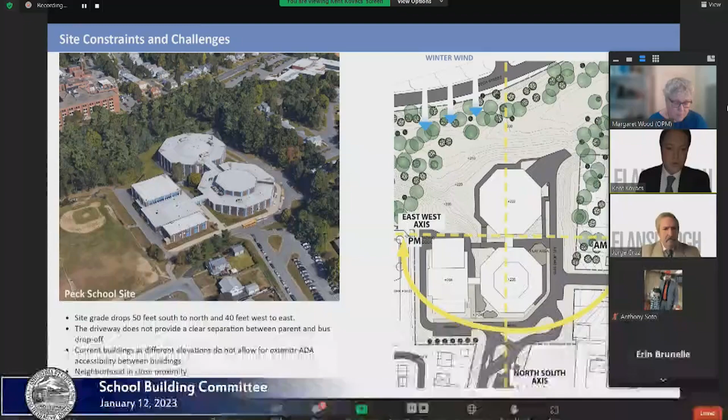And here's a look at the site plan. The building is off to the left on this slide. And this just illustrates that we know you have a difficult site, but this presents challenges, but also opportunities. And over the last 3-4 weeks, we've been able to vet this out a little bit more. And we feel confident what we're presenting to you with costs and the design will fit right between the budget and the schedule.

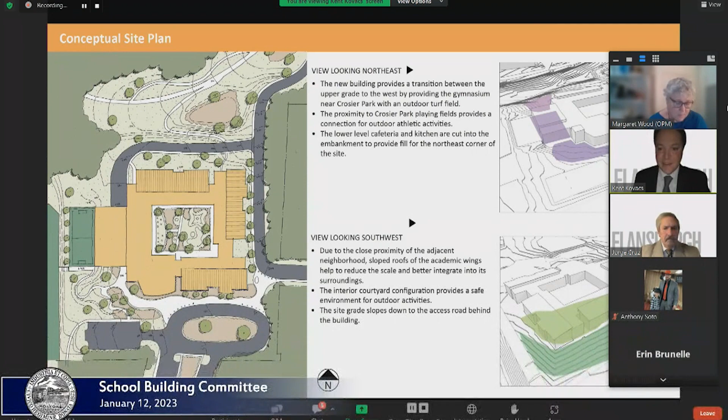Here, as you see, this is the West Bridgewater model adapting to your site. We know it has a steep grade change from east to west and north to south. And we're doing some slight modifications to negotiate those grades. But we feel that this really works well.

And I think an added benefit is locating the gymnasium that you'll see in the next slide at the upper level that's at the same elevation as your existing field helps to create a secondary access for after-school activities, a great adjacency, and then allows the rest of the building, the academic portion, to sit proper within the site. And so all the academic spaces you see here are at one level. And I'm going to go into further slides that will explain that.

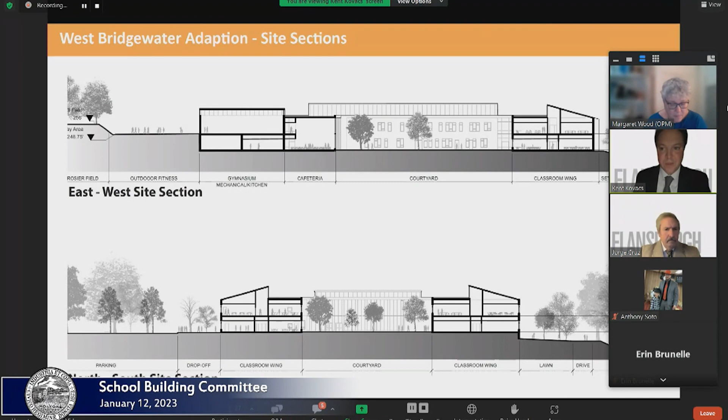So you see the gymnasium that's up 14 feet higher than the rest of the school. And this really is the main move for our model school. And this is what people and the students are going to experience as they come to your school. And I think it creates a great sense of arrival. I think it creates something unique to Holyoke and that you can be proud of.

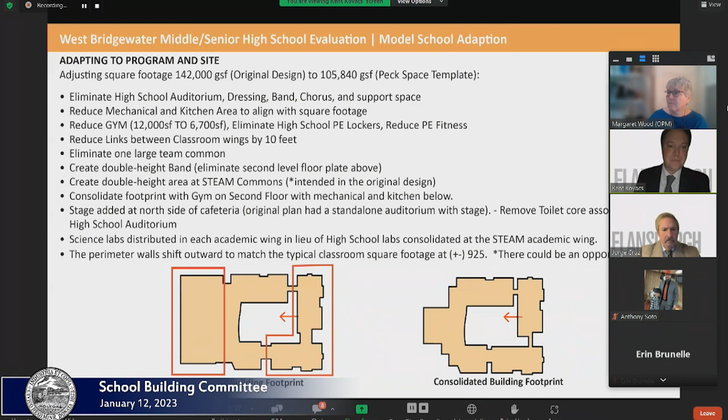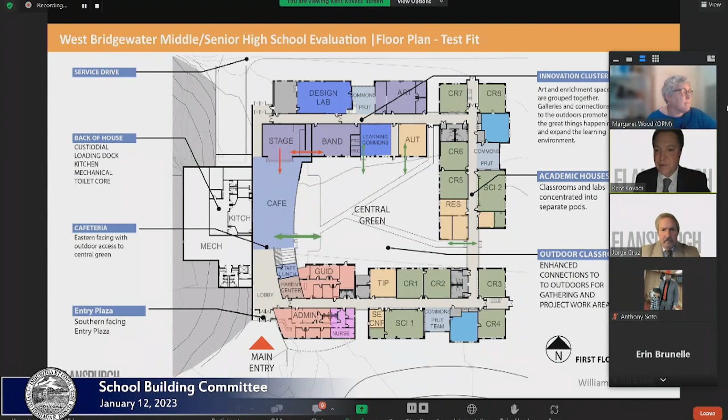And then we go into some of the enrichment spaces of art and band, the design lab that you have in your program. You've done a great job with your educational program for this project. And so there's a lot to work with. And then we go into traditional academic wings, of which we've incorporated distributed special education, teacher planning, breakout spaces, classrooms, and science labs.

And I just want to take a moment to show how straightforward this plan is. So this shows how you enter the building on the southern side and how simple the circulation is. This is at one level. This is a 2-story building. So at the first level, it's a simple loop circulation around the building that connects those academic wings to what we call Main Street. So you enter the building, you're on Main Street with the cafeteria, there's the stage, and then you go into the academic wings. So for securing this building, it's very straightforward. And for students to navigate it, it's very straightforward.

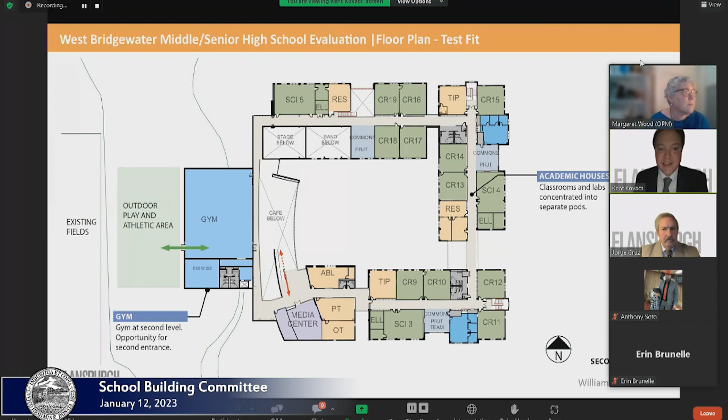Not too different from what you currently have, but the gymnasium could have the opportunity to have a separate entrance, and you could lock that off from the rest of the building for extended community use. You could have elevator access, an entry, toilet core, and have the gymnasium component as a self-contained entity. And that's accessed through the second level, which is not uncommon for a lot of public school projects we've been working on. This would have access to an outdoor play and athletic area to the left of the gymnasium.

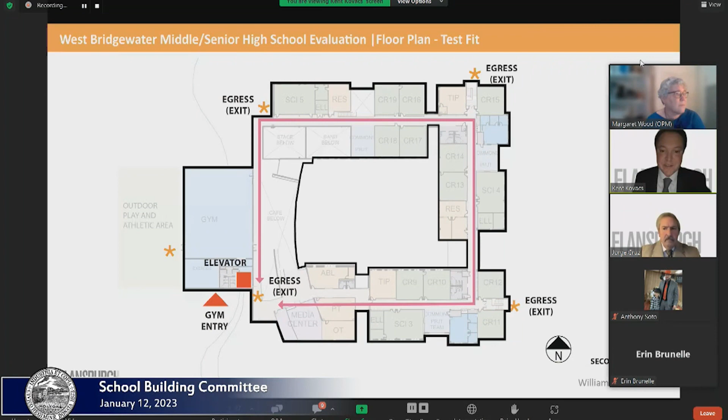And then when we look at the simple circulation through this floor plan, again, we're only doing 2 stories here. It's a simple loop with egress. And here we're noting a potential secondary gymnasium entry. And then the elevator connects that. So looking at the site and our building and the way we're to adapt that, we feel that this is straightforward. We see a lot of flexibility. It's easy to monitor for after-school activities. And it's one of the reasons West Bridgewater is a great fit for your site.

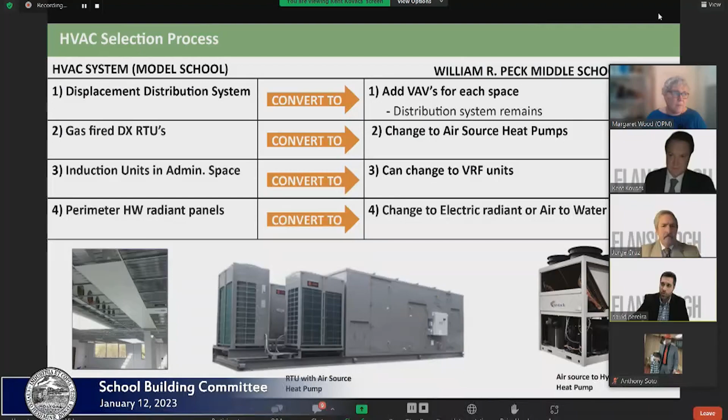If you want to go back to the previous slide. Yeah, there we go. All right.

Understanding the system options and the technologies available. So what we do is in this process, we explain the pros and cons of each system to the client. Our goal is to ensure that the facilities department is comfortable with the required maintenance and the operation of these solutions.

As you can see, as of July 2023, the 10th edition of the code will be adopted, which puts us in the IECC 2021 code and introduces even more energy requirements, such as TEDI limits, which is a new measure of performance, accounting for heating and cooling demand, as well as efficiency, rather than using building usage, which is measured in EUI. There's new energy recovery requirements, air infiltration requirements, and thermal bridging requirements. Although these are new requirements, we've been involved in several high performance design and net zero projects that already included similar measures to obtain that level of efficiency.

So we utilize life cycle cost analysis and energy modeling to study the first, operating, and maintenance costs of the different HVAC options. That would include air source, water source. We could look at variable refrigerant flow, even geothermal heat pump systems. We'll look at metrics such as TEDI, EUI, maintenance and replacement costs. However, it is always important to ensure that the selected system maintains high indoor air quality and thermal comfort for the end user. That's something that we don't want to lose sight of.

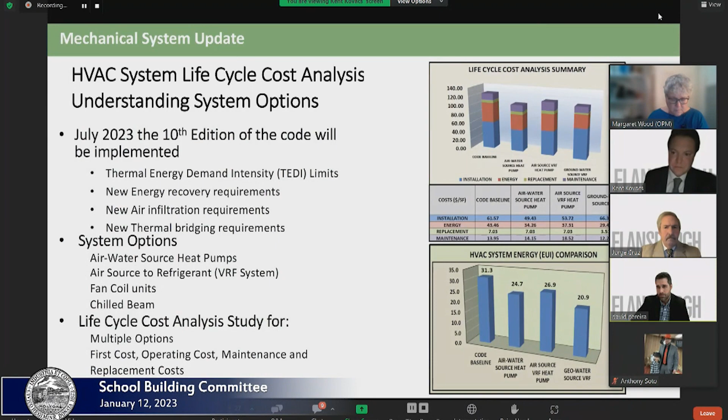Great. Thanks, David. And then just building off of that, with overall sustainability, we want to make sure that we watch stormwater, energy efficiency, water conservation, and material selection. These are just things we do because it's the right thing to do. And if you're going after LEED or CHPS, which you are, we will incorporate that as well.

So with that, Jorge, if you want to take it off for Flansburgh's history with cost control. Thanks. As David had alluded to, we're going to be looking at both capital cost as well as long-term maintenance and operation costs, not only for the HVAC, but all the systems that are in the building, whether that be the roof, the windows, the facade. Every dollar needs to be vetted for a municipal project or any project to maintain the budget.

We've been very diligent in doing this. And as you can see, our average costs of schools are within the industry average. And we're pretty proud of that. And we feel that we can bring that expertise to your project.

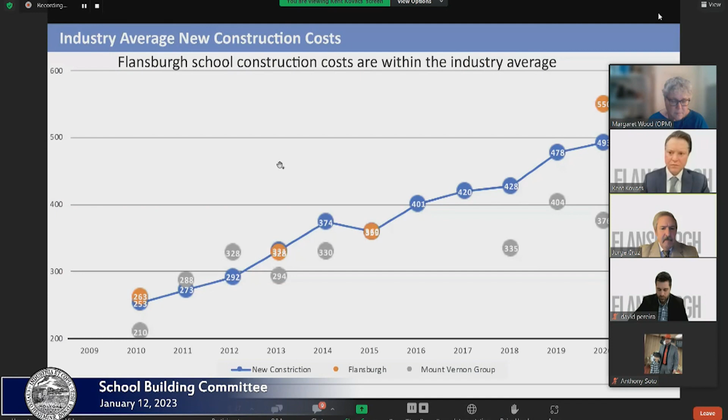Next slide. Now, I don't think Peter got on board, so I will. Yeah, he's here, Jorge. All right, great. He's here. Sorry, I'm here. Masquerading as Amy Happ, but I can tell you it's not Amy Happ. The gremlins were not kind to me tonight with getting on.

But Peter Bradley's our go-to estimator. He has a good handle on the market and where these projects will end up at the end of the day. And Peter, if you could take us through the cost of the trade work and the contingencies and the overhead and profits.

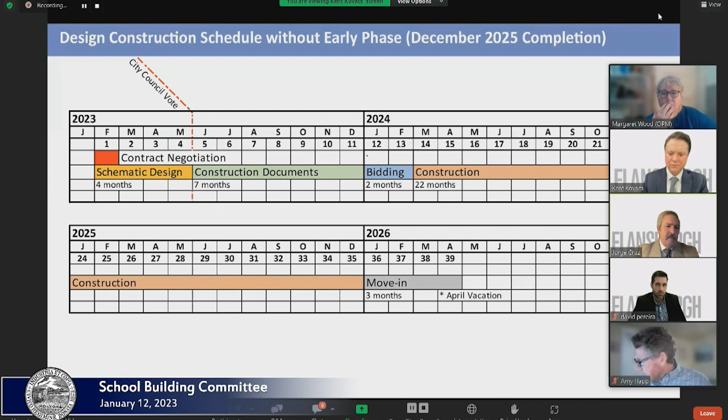Our next slide talks about what if we completed an early site package. Again, the schematic design and the demolition drawings could be developed simultaneously. They will both have estimates associated with them and give the information to the city council for their vote. Moving forward, you would actually bid the demolition section and complete the demolition simultaneously while we're doing the construction documents.

This way, the demolition is complete by the time the second contractor comes on board, and he has a very clean site. We've closed out the original demolition contractor, and this has a 19-month duration. So we saved 3 months on construction, and we're able to move in for November break and Thanksgiving of 2025.

And we have done these projects, whether it's Chapter 149 or 149A. We work very closely with the community in terms of logistics. Where does the construction fencing go? How do we work with police, fire, and DPW to make sure that traffic patterns for construction vehicles do not impact the neighborhood? We want to ensure that all the contractors are parking within the construction fence and not in the neighborhood, impeding parking and other events.

We like to set up a website and try to have a 3-week look ahead from the contractor on that site so people know what activities are going to take place. Unfortunately, construction can be loud, and making everyone aware and touching base with the neighbors is extremely important to Flansburgh to make sure that the project moves along smoothly.

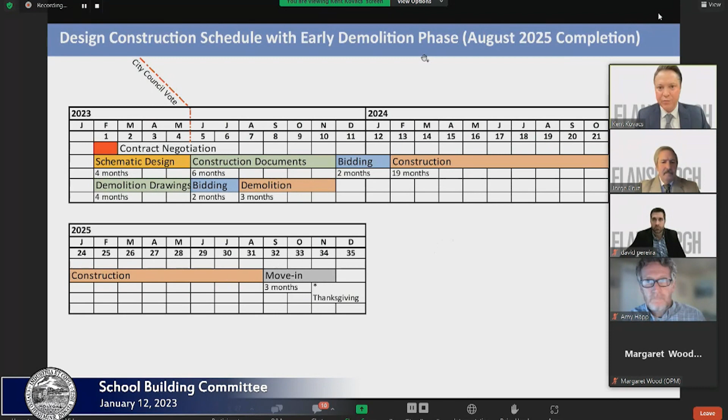And I just want to say, I think one of the reasons why this is a model is all that's been vetted out. We've been through this process once before. This has been built. I would go back even further than the construction side, that educationally, we had a great group to work with that cared about their students. And I just want to share a 1.5-minute video that might have been shared with the group of the West Bridgewater, with the superintendent giving some background to that.

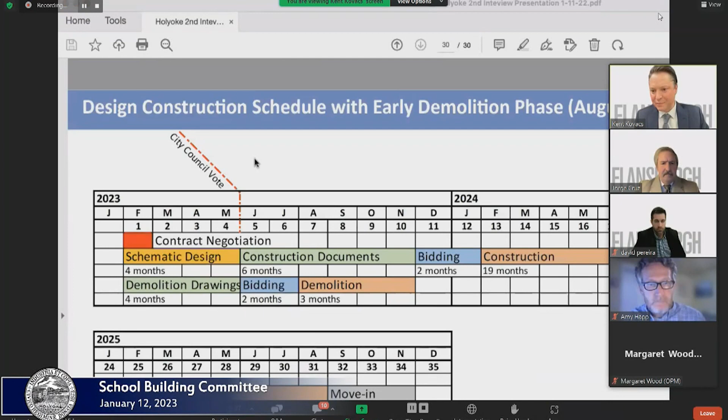Can everybody see this? No, we see your slide still. All right, let me stop sharing. I'll try to do it one more time. We can hear it. Yeah, we can hear it. Well, that's the important part. Let me close this out.

How about now? The town wanted to have a collegiate, college-like atmosphere feel with that campus center style building with the open floor plan. They also wanted something that would be flexible and adaptable over time. And the third thing, which was the most important, and it's the most important because we're in a small community, was to keep the small school feel, but have big school opportunities.

I think the best part of it was working with Flansburgh, that they listened to us, they listened to the community, and then they planned the building just as we wanted it in the community. It's really better than we could have imagined. You know, our kids are going to get the same playing field as everyone else, and they deserve it. And we do great things in West Bridgewater, but this is just going to put them over the top.

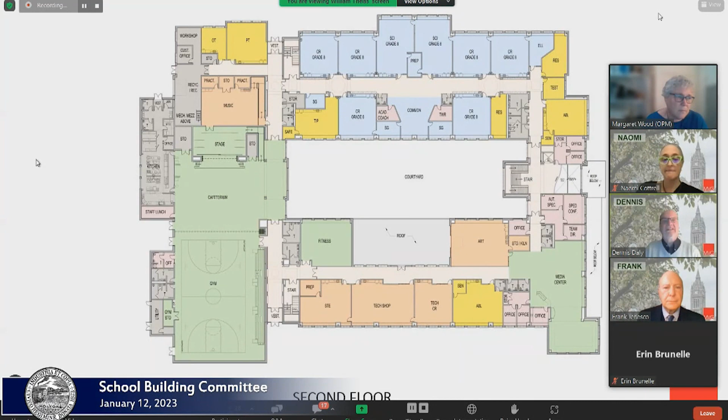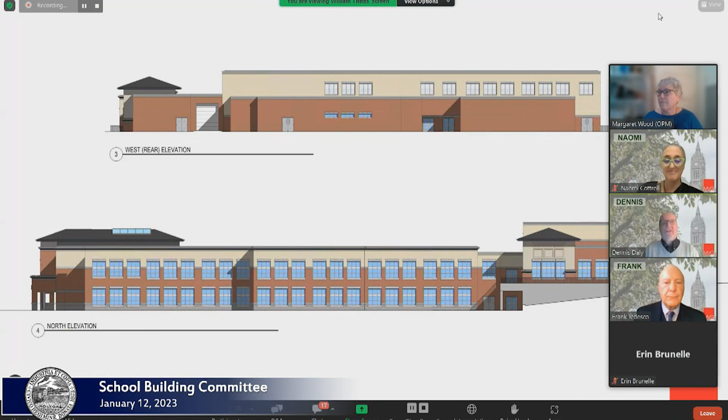And again, you can see how our sculpting, and Naomi will get into that, sculpting of the landscape will allow this to happen. You can also see that reflected on the north elevation. Naomi? Yeah.

So we showed some of these site sections last time we came to you, but wanting to put in a little bit more detail on the building to show you how it does relate to the site. And we really like to think about the opportunities that the site has to offer as opposed to the constraints. I mean, there is a grade change, but it gives us the opportunity to be able to do some interesting things in the landscape. Unlike the model school, every site is different. And so we will work together to figure out how we can compose the landscape in a way that not only fits within the surroundings, but really brings those opportunities.

So in the upper elevation, you are seeing, again, cross section, the cut through the building that shows the gym on the left-hand side, and the entrance on the east side. We're showing parking and the entry plinth. I'm going to go ahead and slide.

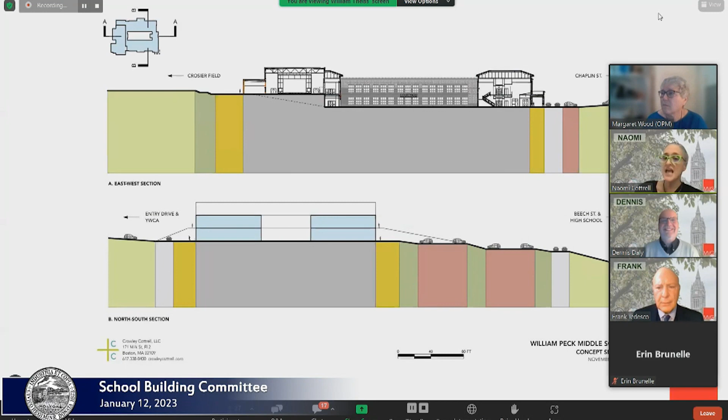Hugo, or sorry, whoever's from Mount Vernon Group, can I actually ask to have my, it's not letting me control your screen, and maybe that's just because of the nature of the Zoom call, but if you could, I think the host may have to turn that on.

The cursor. Yeah, the host has to do the pointing, Naomi. Okay, so William, if you can run the cursor on the entry side on the east. So we would have the entry side on the east here.

What we are able to do with the site plan is create a level plane that goes around three sides of the building. We call this the plinth, and it would allow for accessible entrances all on this first floor plan. What then we can do is we're creating a shift, and the grade changes with a series of retaining walls and slopes up to the second level of the plinth, which is the

level of the gymnasium. We are able to provide for site circulation by putting in accessible paths that go from the upper level at the gym to slice up to the fields. And we're able to do the same between the parking lot and that northern side. So these accessible walkways that we're showing in the plan would all be accessible and just be sloped walks. But we are able to then have site circulation to get to all of the buildings in an accessible way.

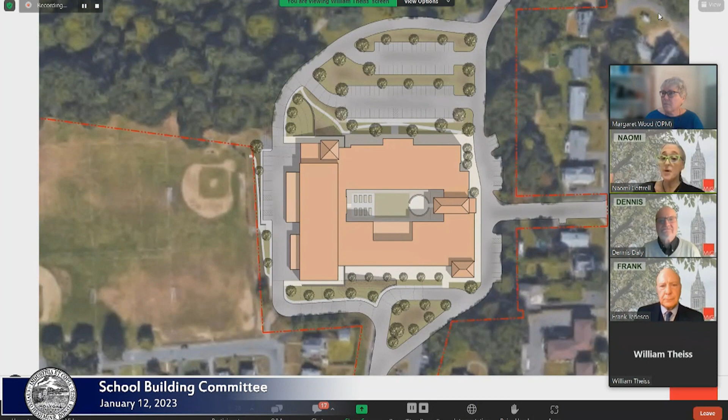There is this kit of parts that I want to talk about in the landscape, which is different from the building. You've been able to see the model school in person, but the kit of parts, again, is different for every site. So some of the things that we would employ here, again, to create site circulation, to really give character to the place. One thing is these accessible sloped paths, which we know we'll need to have and can have all kinds of different expression.

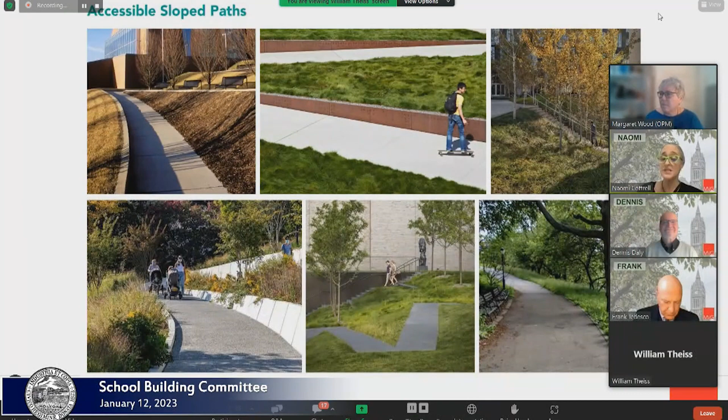This would be where we would work with you creatively to figure out what is the character of the landscape. How are we going to slice in these accessible routes so that they're interesting and functional? Go ahead to the next slide.

I'm a proud mother of an 8th grader right now who loves to hang. And so providing for places for people to sit and to gather, to see and be seen is an important part of what the landing around the building can do. Go to the next slide.

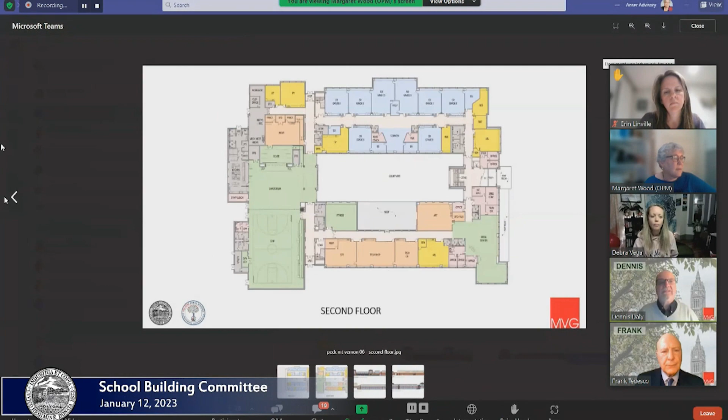Oh, this is great. Thank you very much. Let's go downstairs. This is the second floor. Please go down to the first floor. Let me see if I can do that. I don't know if I can do that. If you can go down to the first floor. Will, do you have that? Yeah, you showed the second floor. You want to just show? Yeah, if I could share my screen, I could. Let's see here. Sure.

Can you see the screen? Not yet. Should be sharing. Oh, 1 second here. There you go. There's something. There you go. Now here's our first floor. So, and thank you for your patience. So now I know what I'm looking at.

This is good. So this pink that you see here is the administrative areas, and right above it is the main entry. Can I use my cursor, Will? No. Oh, okay. Will can point to it. Point to the front. So there's the main entry.

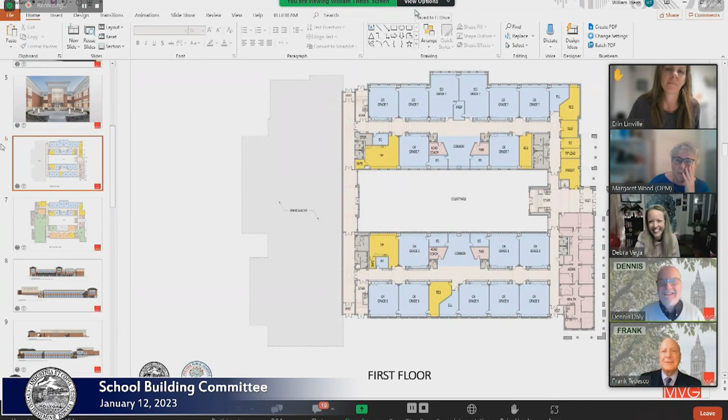Thank you so much for the clarification. That's much better. I get it. Okay, I'm glad. Thank you for the opportunity. All right. Now, Erin Linville. Hi. I work for the district, but I'm not a voting member of the SBC.

On this schedule, the other designer we looked at had this 3-month period for move-in. And I'm wondering how you think about a move-in period. So in your most aggressive timeline, you said it'll be done July or August. We could move in September. Yes. Does that mean kids will be attending school? Like school starts August 25th, say. Are students attending school August 25th in the building, or no?

We would work with the contractor to get the occupancy permit a little bit before that. I show that end of construction duration as the final completion, but we can have what we call substantial completion, which allows occupancy while there are still a few minor things maybe still going on. We always integrate the moving into the school with the very end parts of construction where there might be field work or outdoor paving and things of that nature.

So I don't do them sequentially. I don't like to say, let's get 100% done. I mean, if we have the luxury of time, sometimes it falls that way. Otherwise, we would just integrate that move-in period where furniture is being delivered. It's usually kept in the gym or cafeteria, and then distributed throughout the school. So it's integrated with the end of construction. Thank you. You're welcome.